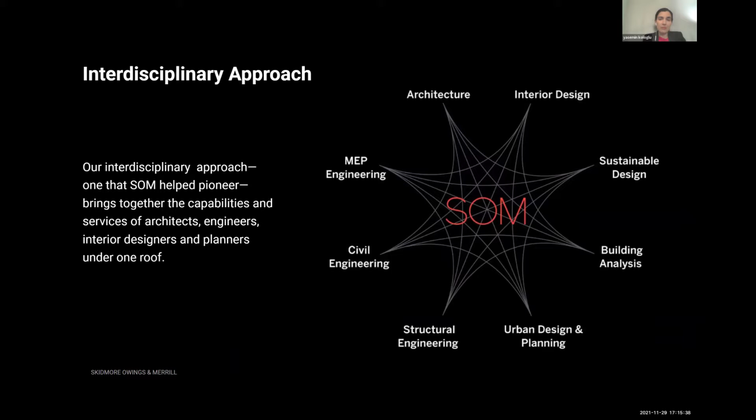And we're actually quite a big company, and we have an 84-year legacy, more than 10,000 projects around the world. We are an international practice, so we have offices across the globe, and we have an opportunity to collaborate with many of our colleagues across the globe as well. And we are an interdisciplinary practice, which means that we're not just architects, but we are designers, we are engineers, we are MEP, structural, civil engineers, urban designers, and many more as well. And we like collaborating with each other, and we believe that this makes our projects stronger, actually.

And we are built on a legacy of our firm. So every project that we do these days, we see it as something that's building on the legacy of our firm. Some of these projects that you see on the screen are some of our work, and you'll be familiar with some of it as well in Chicago and other places also. And in all of this work, actually, we're quite proud of our pioneering spirit, and we like doing the first. We like being the tallest. We like being the most sustainable. We like challenging ourselves, but challenging our industry for a better world for all of us in a way.

And as part of this, some of our projects pioneer new capabilities, we call it. It's the tallest building in the world, Burj Khalifa in Dubai, but we are not just working at this scale, we're also working at other scales where some of them are incubators of ideas, such as AMIE. It's a self-sustaining design, a small design that's actually for harsh climates, let's say. But we also work with a lot of young minds, much younger than many of you. And we believe that actually we have a role, a citizen architect role, to mentor others in our practice as well.

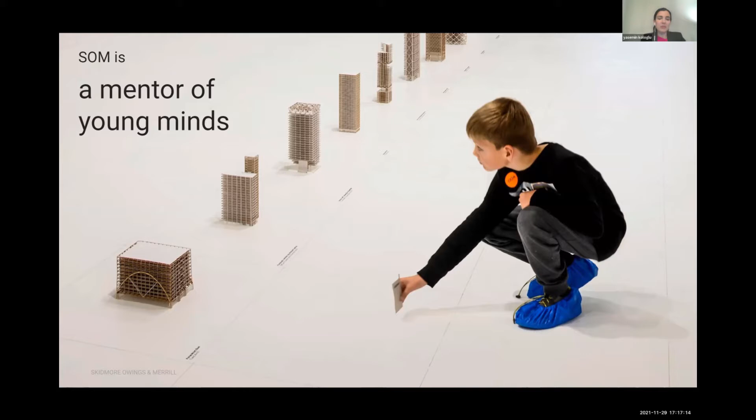So a little bit about what we do these days in our company, but also let's come to what are we going to talk about today? Why does climate change matter? And I'd like to give a little bit of an intro here on the big picture. Why does it matter? Because we are actually living in a world that's changing rapidly, but also the climate change temperature rises have pushed the Earth into uncharted territory. What does it mean? This means that it comes with a lot of unknowns. And we know that climate is changing, but we don't know what exactly the impacts of it will be. And scientists are working very hard to predict it, but there's still quite a bit of an unknown there.

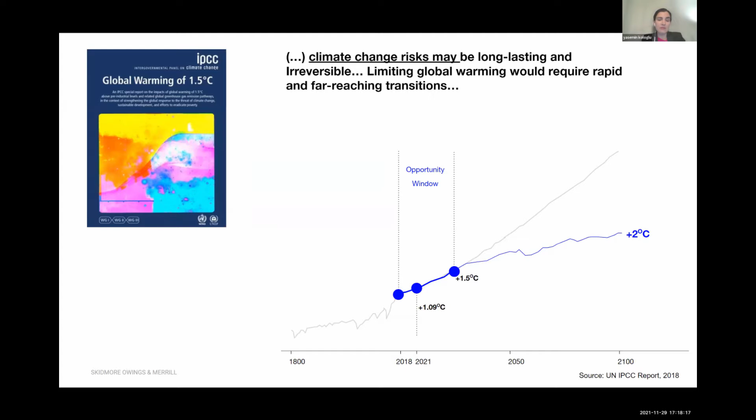And so until this year, actually, we were basing most of our assumptions on the IPCC report that came out 3 years ago. And it was suggesting that we actually had a 10-year period where we can curb our climate change and temperature rises, carbon emissions, to avoid long-lasting impacts of climate change. And this will require a huge transition. However, this year, a new IPCC report came out from the UN, and this is the Intergovernmental Panel on Climate Change, is what IPCC stands for. Basically, all governments come together and look at the research from scientists and agree on certain facts.

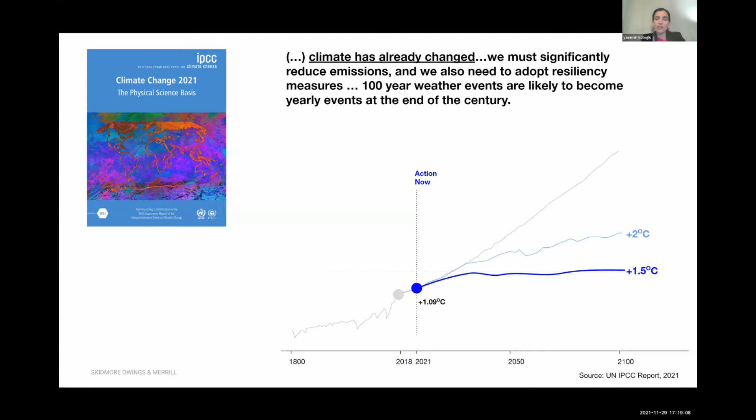And this report that came out this year suggests that the 2 degrees that was suggested previously is already too late for climate, and we have to curb our emissions to stay under 1.5 degrees. And the other thing it did, it's the first time in such a report that governments acknowledge that the climate has already changed. So we can no longer just rely on reducing emissions, but we have to prepare resiliency measures for a climate that's already changed, which is a big moment for all of us, I think.

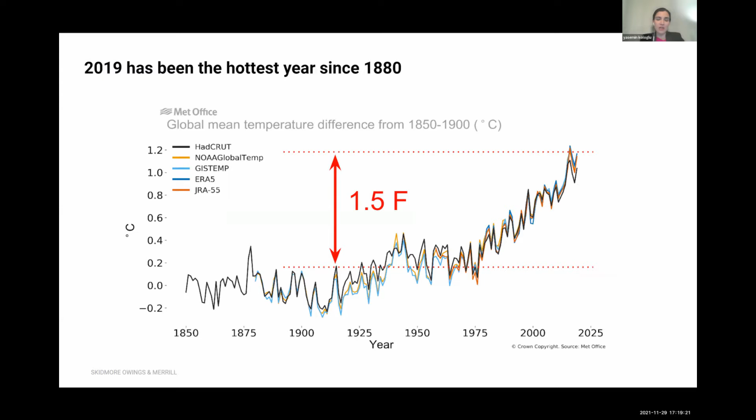And what happened so far, since the beginning of the century, our temperatures have risen already by 1.5 degrees Fahrenheit. And as a result, the extreme weather events in the last 40 years have increased 4 times. And the UN report suggests that if we continue the way we do, some of these events that are considered 100-year events, such as floods, storms, hurricanes, might actually become a yearly event for many of us, and particularly in certain parts of the US as well.

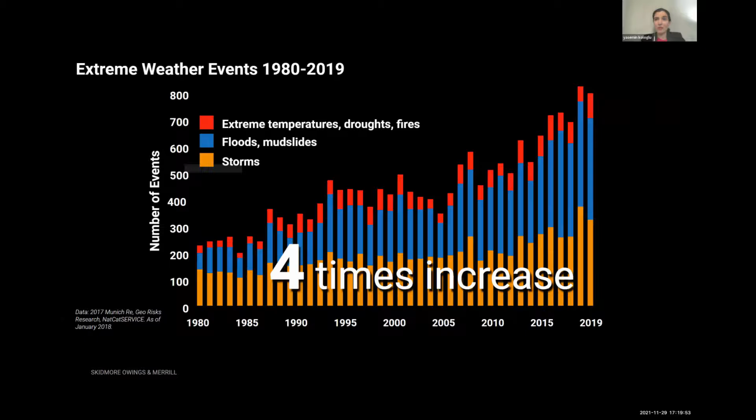So yes, it's changing, and it's not so many good news here. And what this also means is that about 21 million people have been displaced since 2008 due to climate change related weather events. And it's expected that 200 million people will be environmental migrants by 2050. These are huge figures. I mean, if you think about it, it's a huge percentage of the US population, for example, if you think about 200 million people.

And the WHO, World Health Organization, identified climate change as a top threat to global health. And climate change is expected to cause approximately 250,000 deaths a year going forward, which is also quite shocking to see when we write this number down.

So why us? Why, as building professionals, as design professionals, do we have a responsibility? Of the carbon emissions or greenhouse gas emissions that are causing the climate change temperature rises, 40% of those come from the built environment, actually. And many of those are the buildings that are designed, buildings that are in operation, and the cities are also contributing a big part of this. And I don't think it's going to stop anytime soon.

So the global population is supposed to increase by 2.4 billion over the years. So this population growth is going to continue. And then the building stock as a response to this is going to grow about 1.7 trillion square feet, which is also huge. And 40% of these emissions come from the buildings that we're looking at.

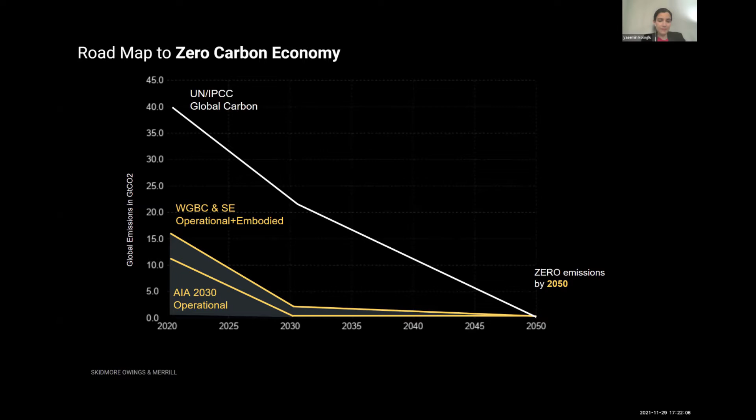But it's not all bad news. What's been great actually is the Paris Agreement, for example, which has been a huge achievement; many countries came together, and more than 185 countries have committed to the Paris Agreement. And besides that, many cities and states across the globe have also committed to net zero emissions too. And how can we respond then? How can our designs respond to this?

For example, at SOM, we have two goals for every single project that we work on. One is net zero operational carbon emissions by 2030. And the second one is net zero carbon emissions overall, including embodied carbon, by 2040. And what are some of the examples that we can show towards net zero?

So let's talk about the first net zero operational school in New York City, in New York State. It is actually PS 62. It's a net zero school. And some of the strategies adopted here were reducing energy use, complementing that with renewable energy sources, designing potential for all electric, and going forward also considering renewables as offsites and potential green energy offsets as well. Although this project was able to achieve this with everything on-site.

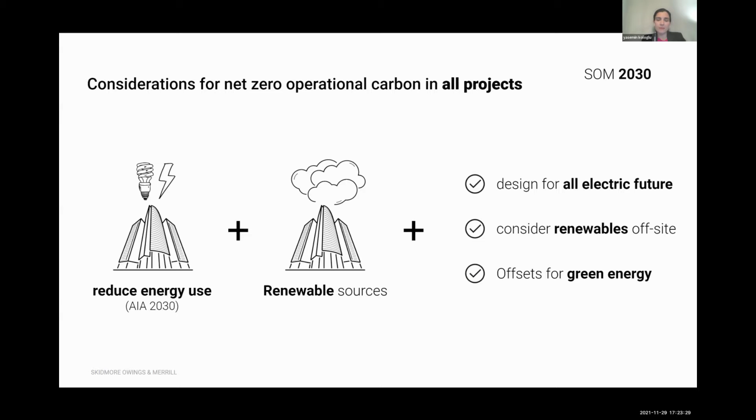And it's a great achievement, and it almost set the benchmark for New York City and state schools that it is possible to achieve a net zero school in our climate and in the city. Of course, many aspects went into making this net zero. It was about a combination of active and passive systems. So the energy that was produced by the building was equaling the energy consumed by the building and its users, such as heating and cooling, lighting and smart systems.

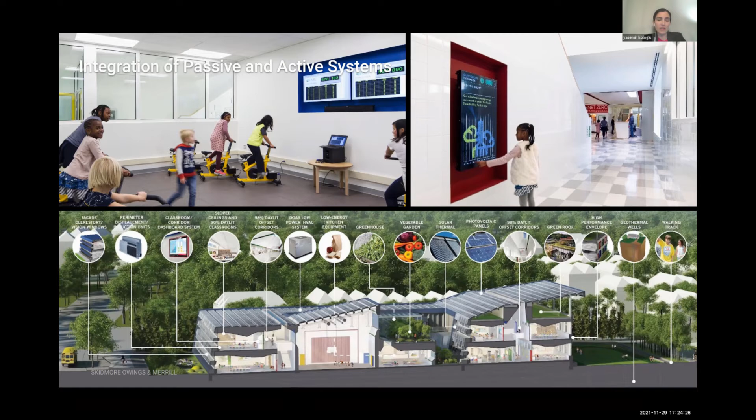And as we did this, you can see that many different strategies had to be built into it, from photovoltaic panels to solar thermal to effective and efficient MEP systems, smart lighting, and also the design of the building had to be very carefully considered, bringing daylight into these spaces. And you can see that many of the squares in the ceiling here are skylights to bring natural light into the spaces and reduce the lighting demand of the building, but also using it as an opportunity for people to experience the building in a different way.

And knowing that it's a net zero school, interaction between students, faculty, and the building was a key design aspiration for this project. And hence we are very proud that it set the benchmark for New York schools for carbon neutrality.

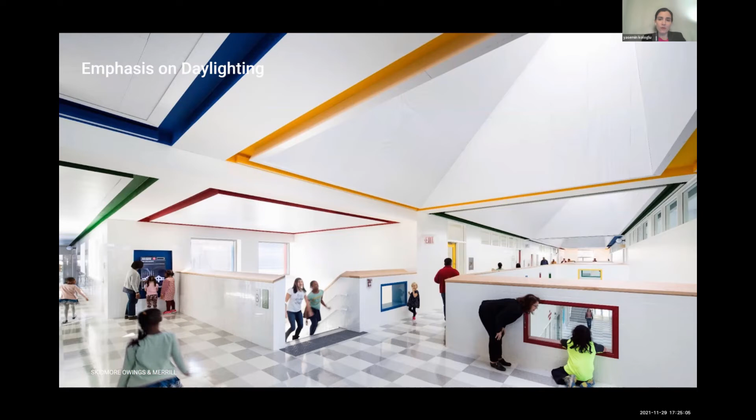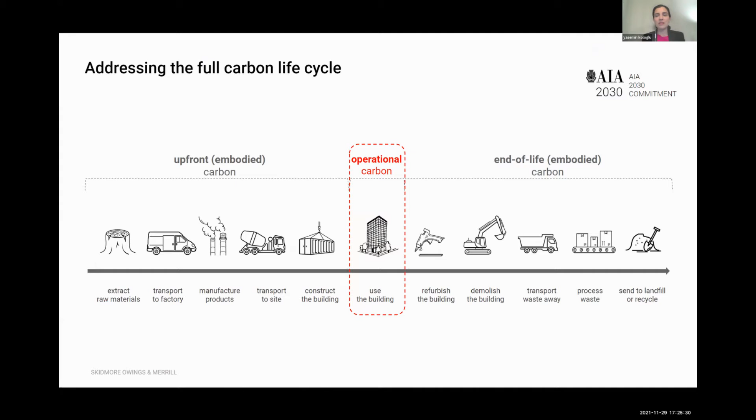So when we talk about operational energy, operational carbon, it's that small part that we're talking about. So as we address carbon emissions, we must think about the rest of it. We must think about the whole cycle together. And this means that we must think about materials.

Where are they extracted? How much energy went into extracting those materials? How was it transported to factories? How was it manufactured? How are we building it? Are we using fossil fuels to create that energy? And then, of course, in use, as we talk about, but also end of life.

What happens to those materials when we demolish the building or when we take parts apart? Are they recyclable, upcyclable, or are they going to landfills? And all of these questions actually give our materials and buildings certain carbon values. And of course, the more recyclable we make it, the more renewable energy we use in the process, the lower carbon they become also.

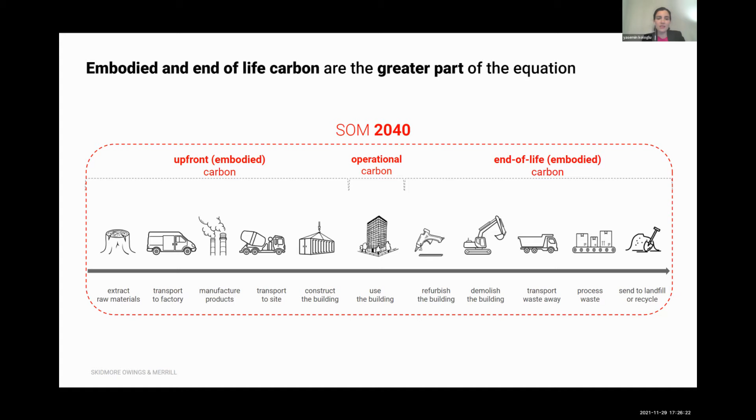So the next project that I'd like to talk a little bit about is towards net zero materials. So what does it mean if you look at embodied carbon? It's the Billie Jean King Library in Long Beach, and you can see that in this project we combined cross-laminated timber and timber in many parts of the building. And because timber is a low carbon material, and because of its carbon absorbing properties, it is able to absorb carbon through its life and not just become a low carbon emitter, let's say.

And as part of this, in order to minimize the material use, but also in order to minimize the waste in this project, we looked very carefully at all the components that went into it. So we took a kit of parts approach, and you can see here some of the parts that went into this project, and the whole project is made by the parts that you're seeing on the screen.

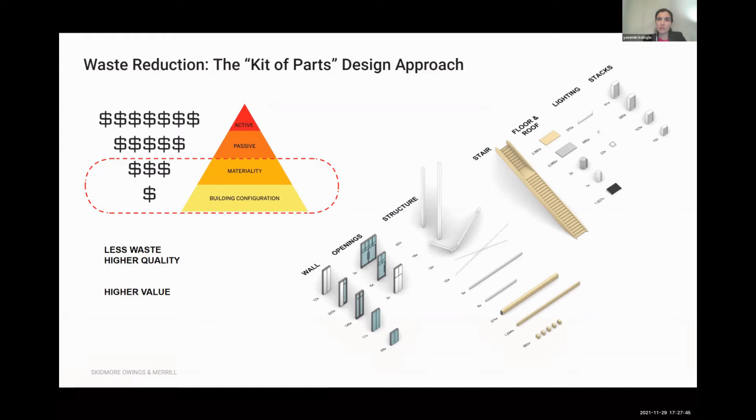And the idea was that, as you see in the pyramid on the left, the materiality and building configuration has the biggest carbon impact, but also has the lowest cost impact too. So we were able to minimize the carbon emissions of the materials and reduce waste dramatically.

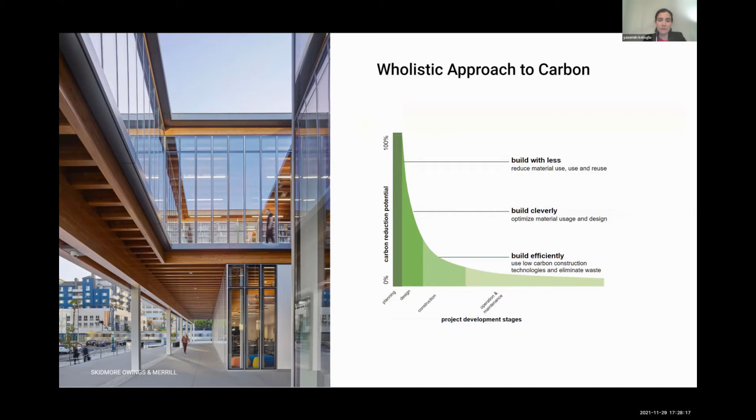And in the design process, the planning and the design of the building is where we can make the biggest impact. So if we adopt several principles, such as building with less materials, building intelligently, with optimized material use, and actually using materials that are low carbon, and then finally building efficiency into the systems, it can help us dramatically reduce the carbon emissions of a building. And those are some of the strategies that were used in this particular library project.

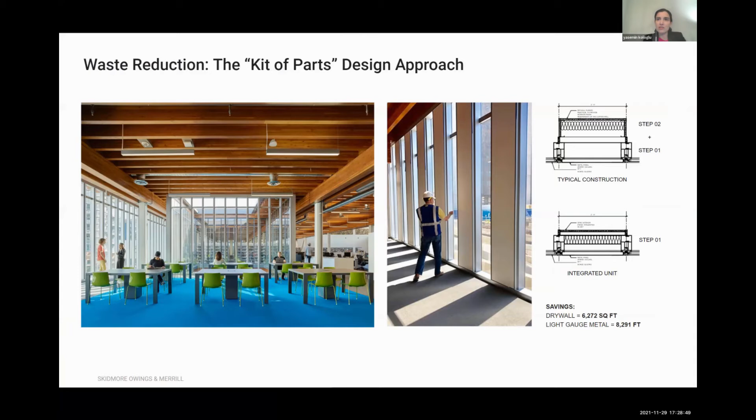And in this one also, we didn't just think about timber, but every detail, every material part of the building was looked at carefully to be able to reduce quantity of materials and carbon that went along. So on the right side, you see the typical wall construction versus the integrated unit at the bottom. And by just doing this, we were able to reduce material quantities significantly. And you can imagine, hence the embodied carbon also was dramatically reduced here. And it's built, and this is what it looks like. And we are quite proud of it.

And we see that as designers, as we continue to push how we design, we're also seeing that cities are adopting different policies. And I'll talk a little bit about what we have in New York, but you have similar policies coming in also in Chicago, for example. Our goal here is to reduce our carbon emissions 80% by 2050.

And as a result, many of the existing buildings are given a carbon cap a year, and any building that exceeds that cap has to pay a penalty. And it's a significant penalty. It's about $270 per metric ton of extra carbon emission. And this adds up. So many of our buildings in the city are now looking at how we can reduce the carbon emissions of existing buildings.

So this is an idea project that we did in New York City. It's 63 Madison. How can we actually take an existing project through adaptive reuse and push it towards net zero? The building looks like this today, and it is obviously of its time, and it was designed with the performance standards of the time. And we were looking at how we can take an existing building with this performance criteria and apply today's standards.

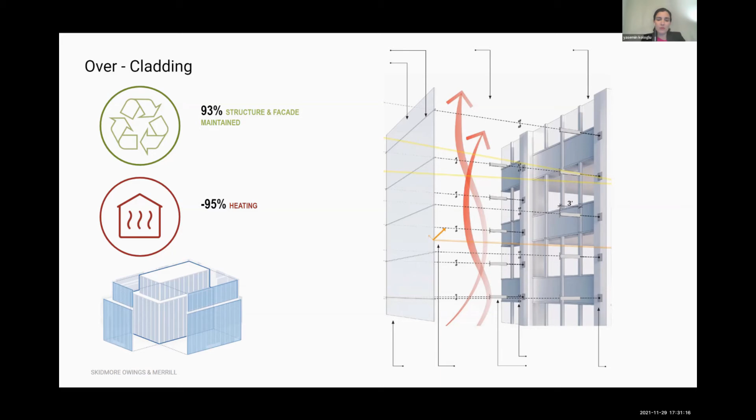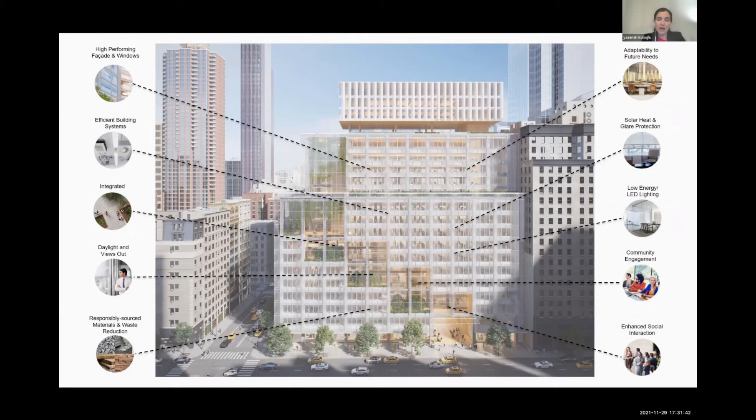And of course, this was only some of the aspects of the project. And in order to get it very close to net zero, we had to look at everything carefully. We had to look at the building systems, facade design, materiality, daylight, views in and out, and also create connections and well-being aspects, integrate well-being aspects into the project also.

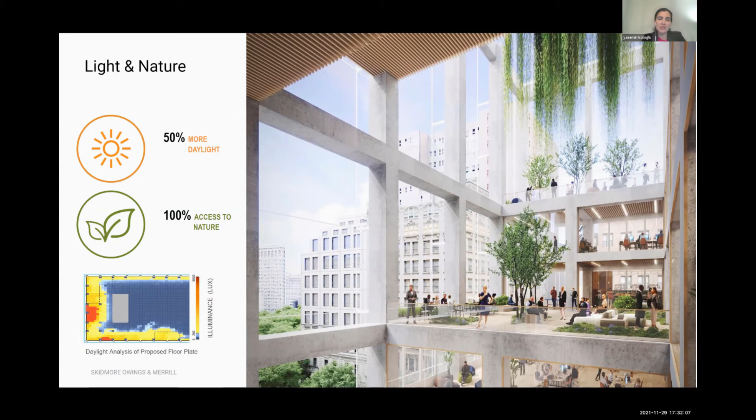And what this meant is that we could bring 50% more daylight into the spaces, and we could provide every floor 100% access to nature. So we could create amenity zones on every floor, which also works with the biophilic design aspirations we had also. And by doing so, we were able to reduce energy costs by about 40%.

We think that we could also increase the potential revenue by about 35% based on the data from other projects. And this will become a net zero building as our grid cleans up in New York City. This will actually become a net zero building as we go forward, if these strategies were adopted in the building.

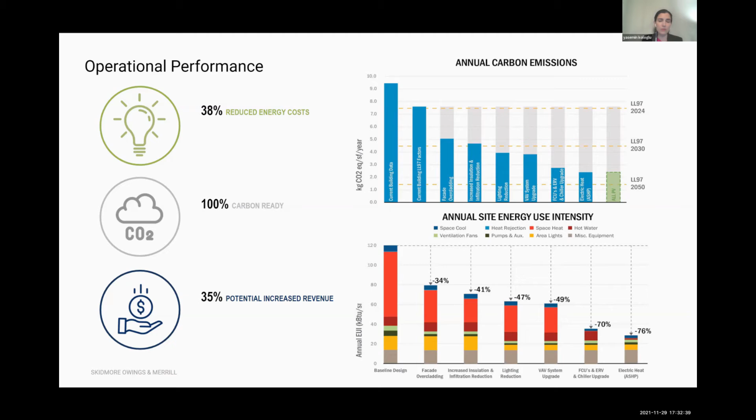And as we went through this process, I mentioned that we chose to overclad the building and not reclad it, which meant that we carefully considered both embodied carbon and operational carbon of the building. And we found out that overcladding is actually much more efficient for both, about 40% less operational carbon and 40% less embodied carbon as well.

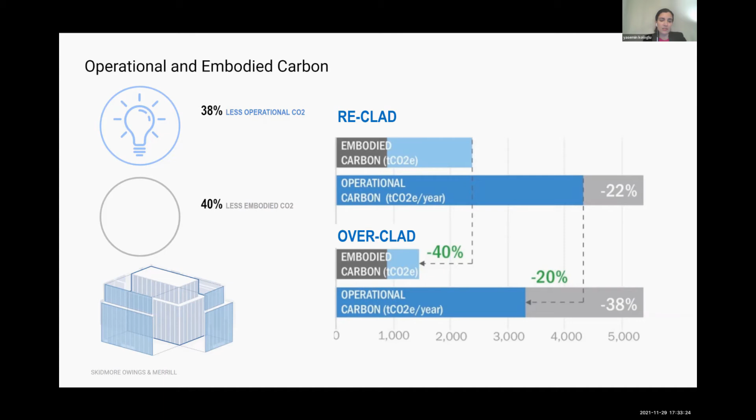So the point of this is that sometimes our gut reaction to take something out and put a new one in might not be actually the most carbon efficient result. So we have to think carefully about our designs, how we can incorporate carbon smart strategies in our designs. And this is what the building looked like if it was adopted.

And then towards the net zero, the last project that I'd like to show is actually the UC Merced Campus in California. It is a net zero campus, and it is a product of a 25-year partnership with UC Merced that we had. And the idea was the campus is targeting triple net zero, meaning net zero energy, net zero waste, and net zero carbon.

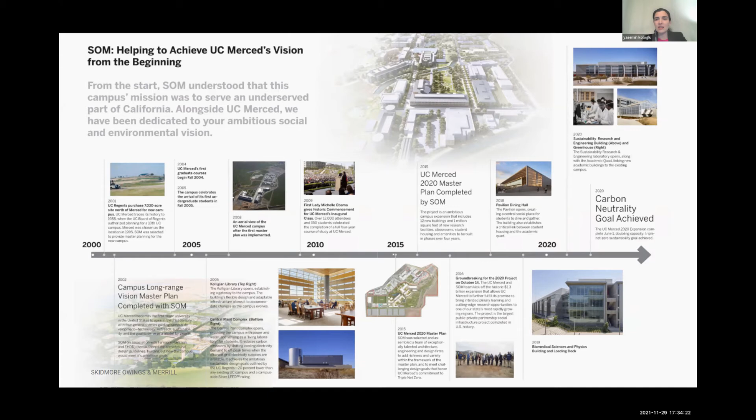And over the 25 years, many different aspects were incorporated to drive towards that goal. So sometimes adopting something towards net zero takes time and consistent strategies, consistent planning. And this gives you an indication of what it took. And this year, actually, it was announced that it's the first public university to achieve carbon neutrality in the US. And we're proud of the 25-year legacy we had and that we were able to achieve it.

And you can see that we can do this in small scale, large scale. So carbon neutrality is a concept we should think about at various scales, not just in a small building scale, but also in a district and a campus scale also.

And so far, I talked about carbon neutrality, but can we go one step beyond? So can we not talk about reducing carbon, but can the built environment actually absorb carbon instead? So can we create a carbon positive environment rather than reducing it? So I'm going to show you a project called Urban Sequoia, and maybe you've seen it recently. It was presented at the COP26 summit.

And the idea is how can our cities go from emitters to absorbers? Cities account for about 70% of global carbon emissions. And so far, our buildings have focused on net zero architecture. But we are saying that net zero architecture might not be enough any longer. How can we absorb carbon from the air? And the provocation we had is, what if each building acts like a tree and absorbs carbon from the atmosphere?

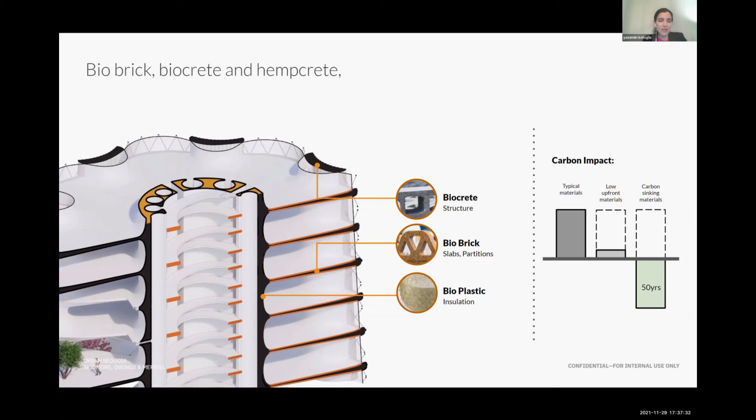So they can be sequestering, absorbing materials rather than something like concrete, for example, that emits carbon through its manufacturing process. And can we actually design a building that uses biocrete, biobrick, and bioplastic, and not only reduces the upfront carbon, as you see on the right, but throughout its lifetime actually absorbs more carbon than it emits in the process? And what else can we look at? Can we look at technological advancements, for example?

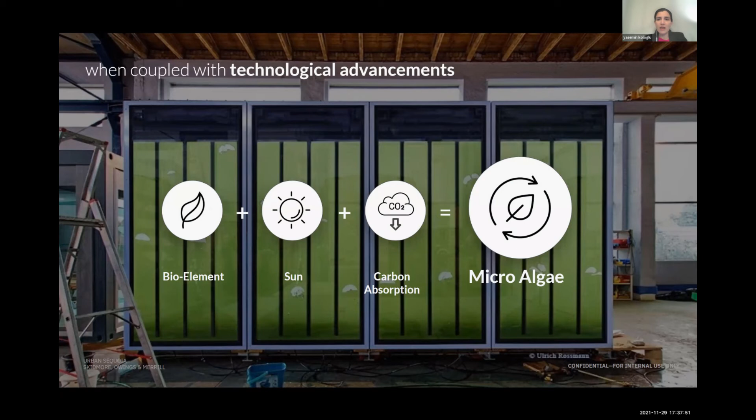This is the algae facade idea, and it basically takes algae and sun, and with the natural photosynthesis process on the facade, it is able to absorb carbon from the atmosphere and turn it into microalgae production. In this process, it absorbs carbon directly. And the algae produced can be used as a source of biofuel and in other uses, such as heating and cooling of the building. It's an alternative fuel source; you don't have to use fossil fuels. Or it can also be transferred to other industries, such as jet fuels, electricity generation or agriculture as well.

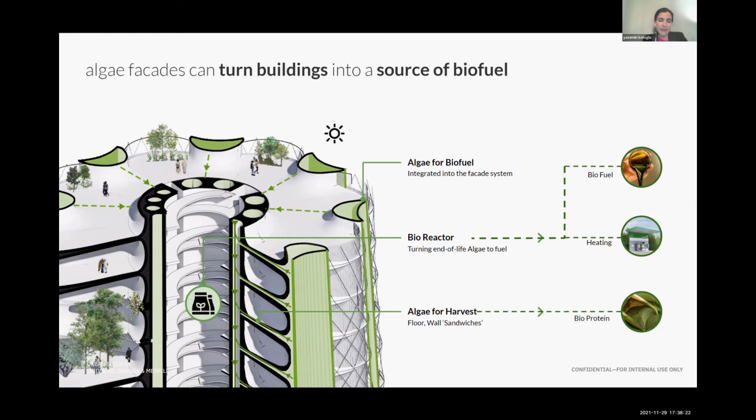And the last one is carbon capture and storage technologies. Maybe you've seen some images of them. They exist at the moment as direct air capture farms, just as in the old days we had PV farms, and that was the only way to use PV. Then buildings started applying them in the cities, which meant it became a much more dispersed, much more effective, and much more cost-effective system as well. And this system has a similar potential.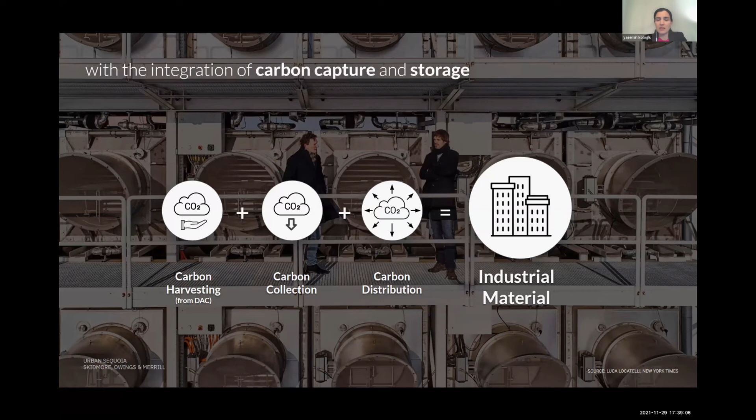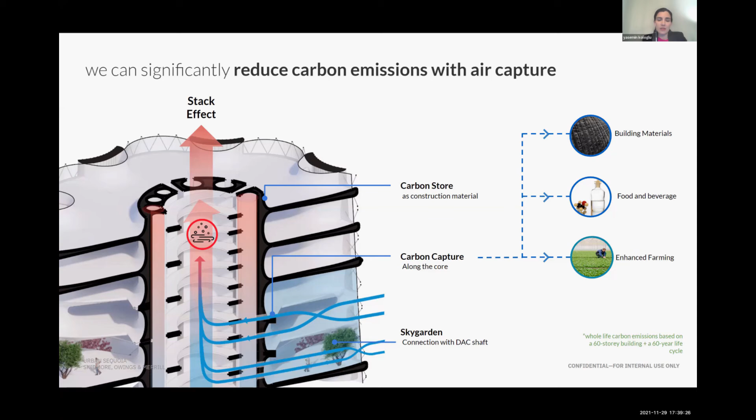What it does is harvest carbon from the atmosphere, and then it's collected in bottles and distributed into different industries. Some of it is used to create materials such as carbon fiber. And can we do something similar here? Can we use the natural stack effect of the building and introduce direct air capture modules in the building to capture the carbon directly from the air and transfer it to other industries?

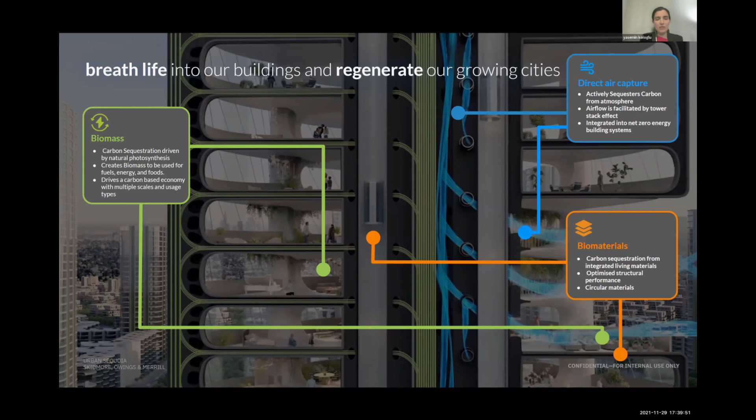And how can we bring some of these ideas together? In our building, we're looking at mixing biomass, such as algae, biomaterials, such as biocrete or biobrick, and direct air capture technologies, to create almost a prototype for the next generation of building that is not just reducing carbon, but going beyond that, absorbing carbon from the air. And the absorbed CO2 can be used in other industries. The algae can be used in other industries as well.

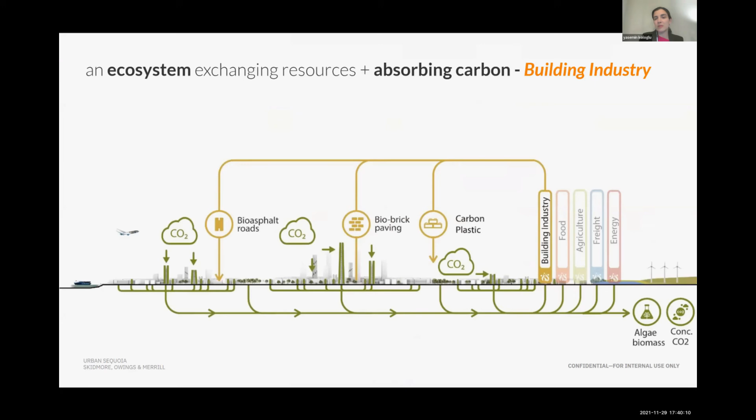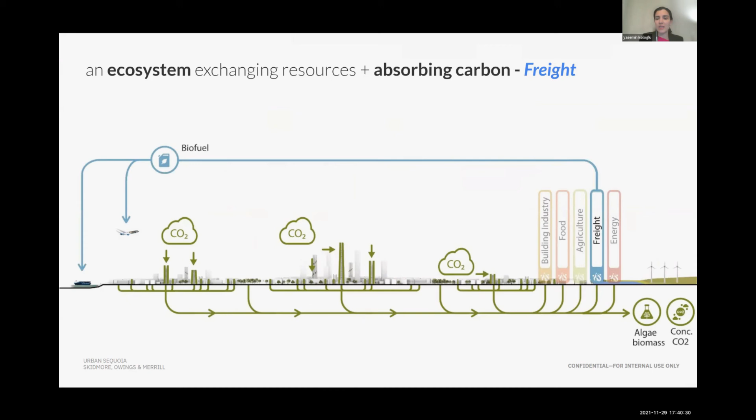For example, the CO2 can be used as carbon fiber in the building industry and production of some plastics. It can go into the food industry. The algae can be used as biomass, but also as fertilizer for agriculture. It can be used as jet fuel and as a fuel source for many transportation and freight industries, and it can be a source of energy as well. So rather than using fossil fuels, it can be a clean energy source to produce electricity.

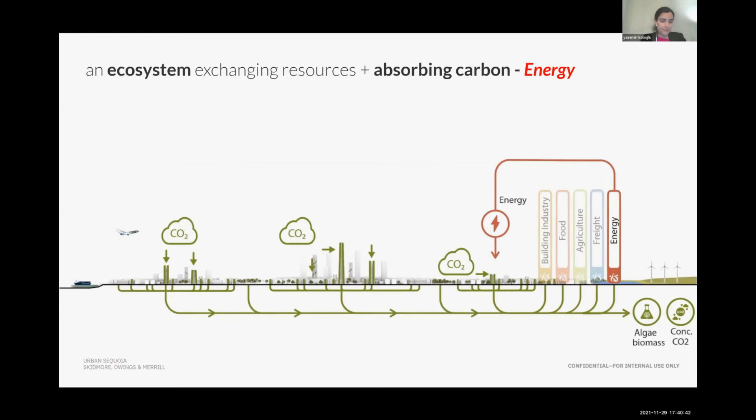And let's think about a city like New York. What if you were to create a network of systems such as air capture, biomaterials, and algae? Could we think of our cities differently? Our collection points are not simply about garbage collection or recycling collection, but can we think of a carbon collection system, for example, to enhance our environment absorbing carbon?

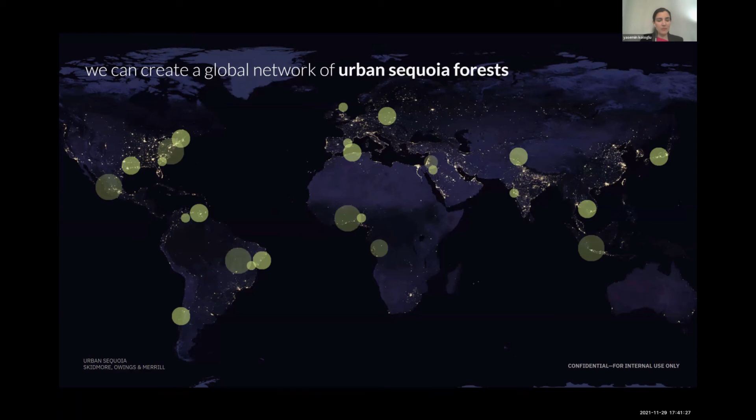And if you were to create a global network of urban sequoias around the world, imagine every major city were to take a similar approach and create a network. We could actually absorb about 1.6 billion tons of carbon every year. It could be a solution to our climate challenge, and our urban environment could actually be a solution to addressing climate change in this scenario.

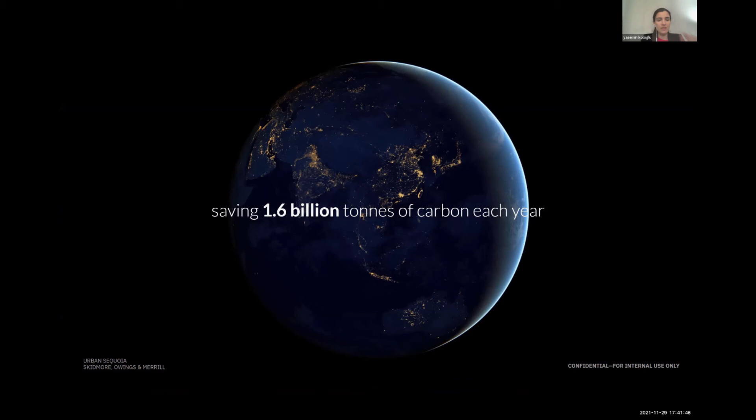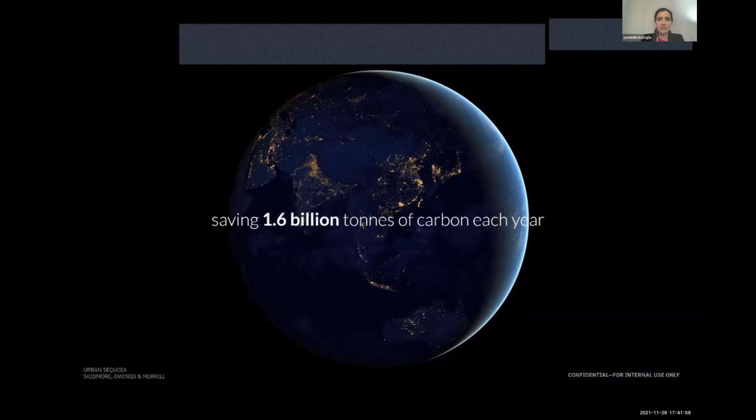And I'm going to stop my share for a second because I'd like to show a short video. Let's see. Hopefully you're able to see my screen still, and I'm hoping the sound is going to work. Let's see.